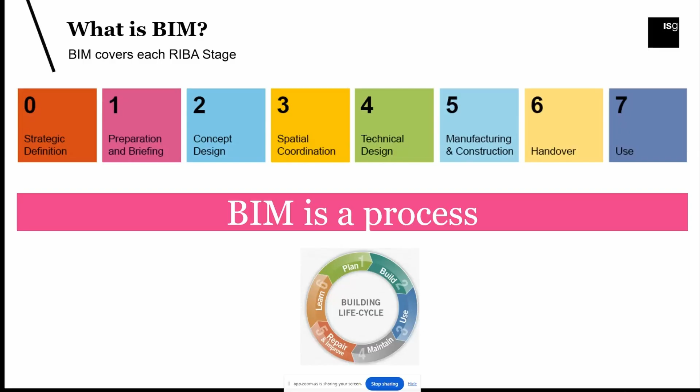So building information modeling, as we said, is a process, but it is also related to a 3D environment. When we talk about 3D environment, we mean that all the stakeholders are involved in this process, providing not only BIM documents, but also, of course, a 3D model. So we have BIM models coming from the architects, from the engineers, M&E engineers, structural engineers, and in ISG, as we are a construction company, these models arrive to us during stage 4 or 5.

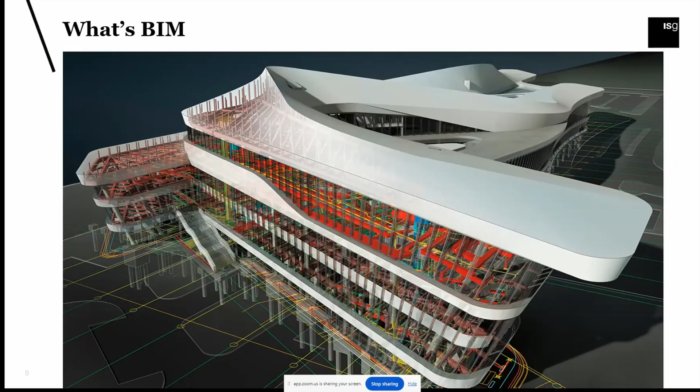This model gets basically converted into a more developed model, so the level of detail rises. If in the architectural model we only had some general walls or some general furniture, the stage 5 model is way more developed. All the walls, for example, have specific thicknesses and specific types. The furniture is directly created from the manufacturer in a 3D environment.

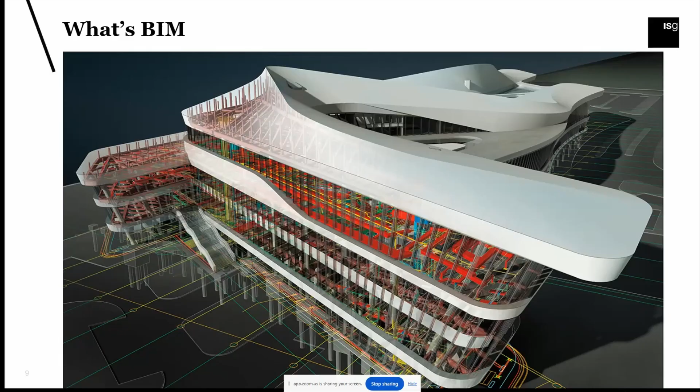What we do is coordinate all these models together, having one single source of truth. The main benefit is that by coordinating these models in pre-construction, we manage to solve a lot of coordination problems. And of course, this resolution helps the construction team a lot, preventing any type of issues during the construction phase.

As a digital construction manager, I implement new technologies. The R&D part of my job is quite important because we always try to find new software, new solutions that streamline all our workflows. Of course, we produce BIM standards, BIM documents and templates. We help the coordination, the clash detection, and we also help a lot our site teams, supporting them on site every day directly from the site office.

As I said, BIM is also very important throughout the end of the project when we provide also asset data, asset register, COBie spreadsheet. And part of my role is also to make sure that at ISG we maintain the BIM certification.

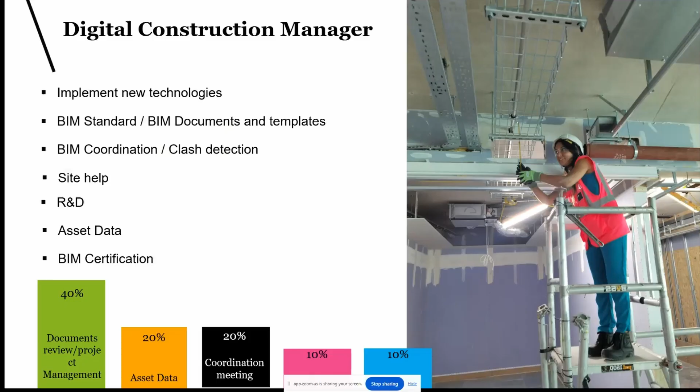So looking at the more technical aspect, these are some of the software that we use in ISG. Today, I want to describe 3 software in particular: Revizto, OpenSpace, and Microsoft HoloLens.

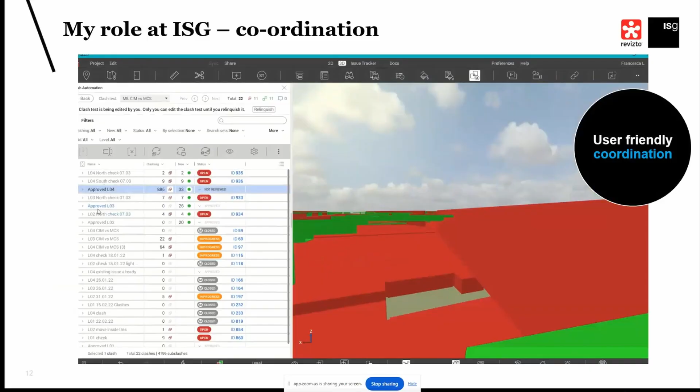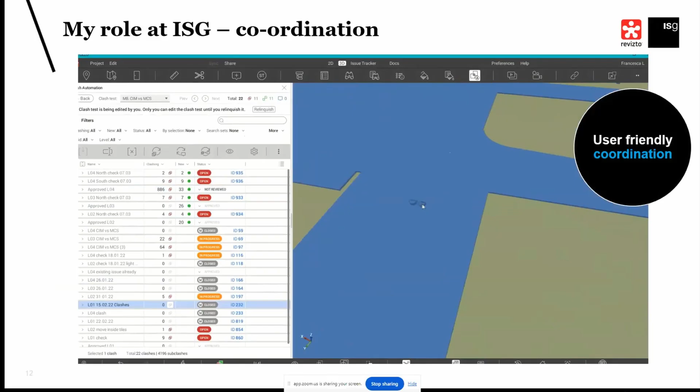Revizto launched almost 3 years ago the Plus version, where the clash detection is embedded. I think the software has really streamlined all our processes. We cut time and cost almost by 50%.

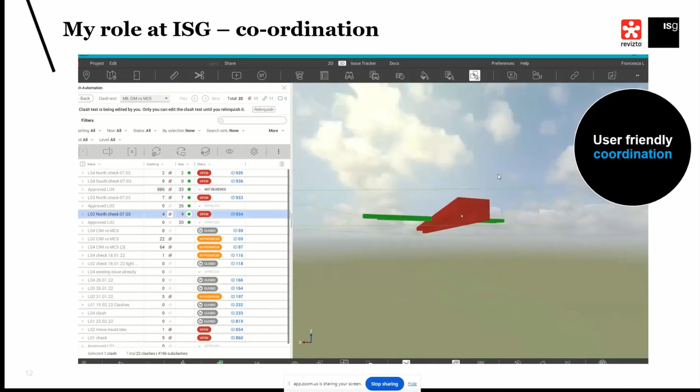And all the stakeholders are involved. They all have access to the software. Under the issue tracker, we have a list of all the clashes where whoever can input their comments. So it's a very user-friendly environment and very collaborative as well.

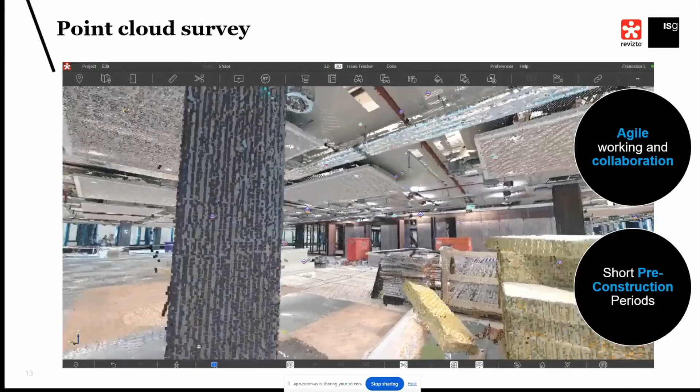As we work in fit out, we most of the time arrive into the project when the building is already built. So we always need a survey. We have this point cloud, and having the possibility of loading this point cloud into Revizto helps us a lot, especially because this point cloud, as you can see from the video, doesn't have any problems.

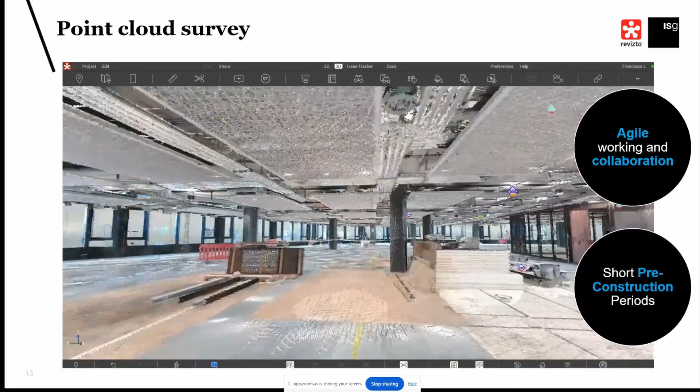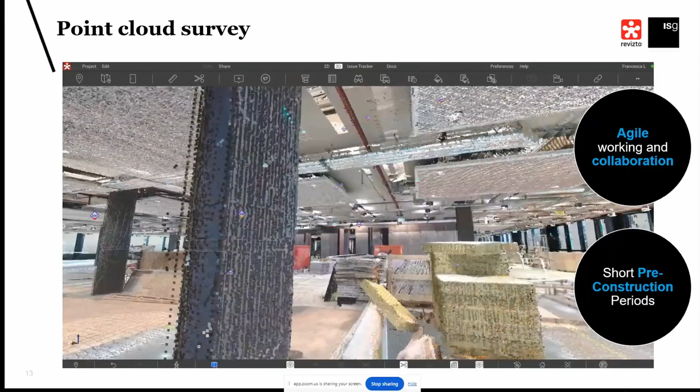The software doesn't have any glitches. Whichever is the size of the point cloud is not a problem. And actually, Revizto has also the possibility of running clash tests with the point cloud itself.

The other software is OpenSpace. OpenSpace allows you to record images from site with this camera put on the top of the helmet. We do our recording every week, and the images get uploaded to the software, to the platform, where you can see the progression on site remotely, wherever you are, whenever you want.

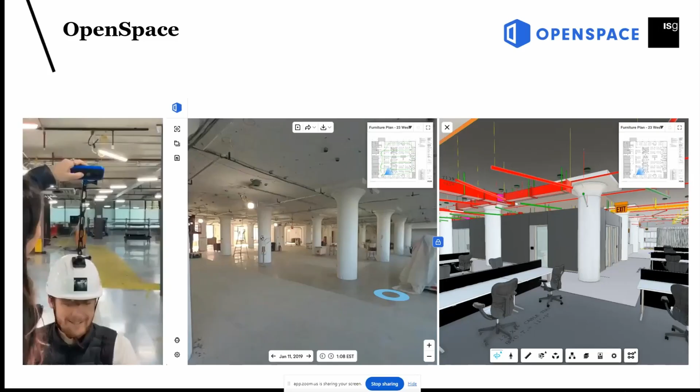And you can also compare the site condition to the model. OpenSpace has also recently launched OpenSpace Track,

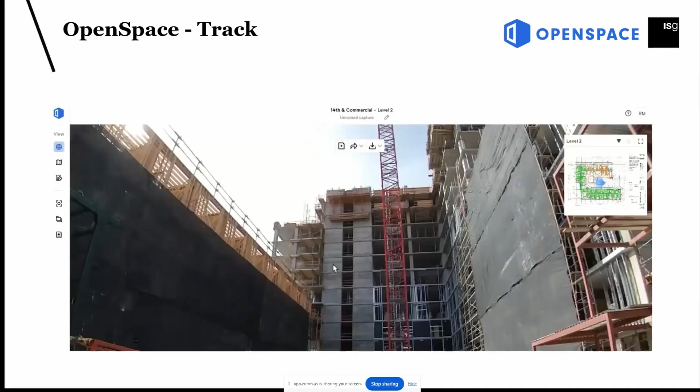using AI and using the images recorded from site. You can basically understand what has been built on site and what still needs to be built. It gives you a percentage of how much the project has been built. Just to give an example, 80% of the wall have been built, so we still need to build the 20% left. And it also compares the progress with the program.

So the software is not only very useful for the BIM team, but it's very useful also for the construction managers and for the planners.

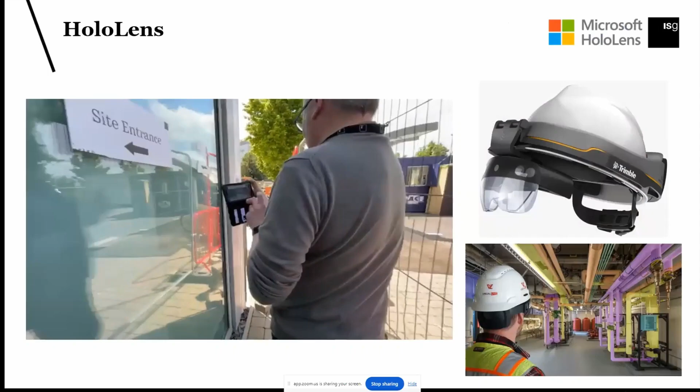The last software or tool I want to describe today is Microsoft HoloLens. We have implemented the HoloLens in one project in particular. Of course, we found a lot of benefits, especially because you can basically project your model directly into the construction site. And the helmet with this computer mounted on top of the helmet basically shows you all the critical areas of the project. It's very easy to find clashes working in the construction site.

And it's also easy to find solutions because you have everything in front of your eyes. It's not a 3D environment, it's a live environment. So I'm sure you can understand the benefits. And the video just shows you how you can basically place the model at the same level and in the same location as per the construction site using these QR codes that are automatically generated by the software.

We organize events in the UK during the year. We have a lot of networking opportunities, and probably our most important event is the mentor scheme. The mentor scheme is a way Women in BIM uses to support and help women in the industry, because unfortunately we know that the construction industry is a very man-dominated world, but we want to convert this world into a gender-neutral world.